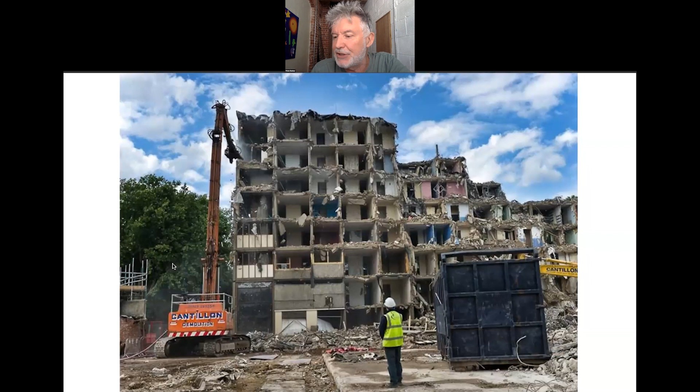This is David Cameron again: 'I believe that together we can tear down anything that stands in our way,' and tear it down they have. In some cases it's being replaced by this, vast swathes of London where demolition is being enacted. This is South London, this is Battersea Power Station, with vast amounts of global capital coming in and building shiny new turnkey developments, many of them empty. There are 30,000 empty homes in London—really criminal in the context of the homeless problem that we have.

And this is the consequence. This is a photograph taken in a subway a few hundred yards from Apsley House and Buckingham Palace. And it's to our shame, our shared shame.

We live in a democracy. We're not just architects, we're citizens. And we're allowing this to go on.

This is somebody's bedroom. It's a picture taken by a homeless person as part of a project that a friend of mine ran, where people were given disposable cameras and invited to take a picture of their own environment. And this is somebody else's flat, a one-bedroom flat in Knightsbridge which sold for £10 million.

So it's a question really of resources not being allocated equally, and really, really shocking. Elsewhere in the country, there are areas which have become depopulated as a result of post-industrial decline, beautiful streets of beautiful Victorian housing which are just boarded up and empty.

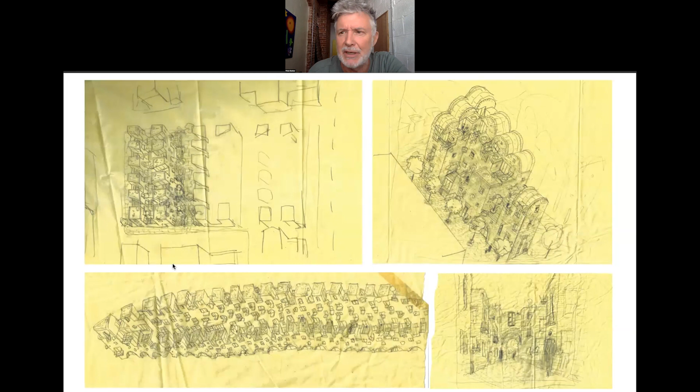I'm still very much at the helm when it comes to designing, and layer after layer of yellow paper are laid onto a site plan till eventually drawings like this begin to emerge and we begin to understand what this thing is three-dimensionally. So we move backwards and forwards between sketches and models very, very rapidly. It's a very dynamic process, and I don't believe the computer can have that sort of dynamism and physicality which we were able to have in ours.

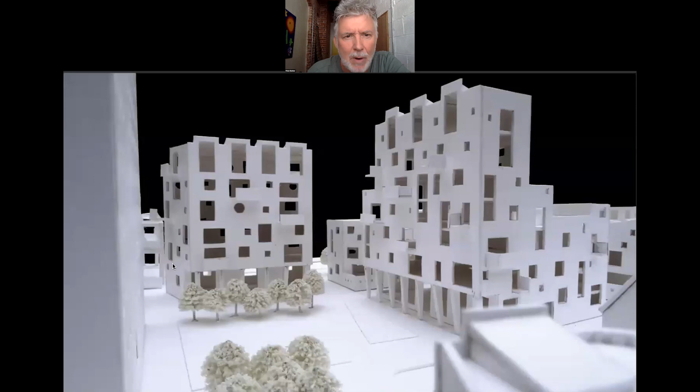Then we move on to a larger scale model where we're able to show fenestration and look at things in a little bit more detail. And finally, on a unit basis, a larger scale, 1 to 50, typically foam core models where we can start to see the interiors and the relationship between the interiors, the street and the courtyards which we're designing.

So this is the first of the built projects I'm going to show you, and it's Donnybrook Quarter. It's a competition we won, 20 or 25, maybe 30 years ago, 25 years ago.

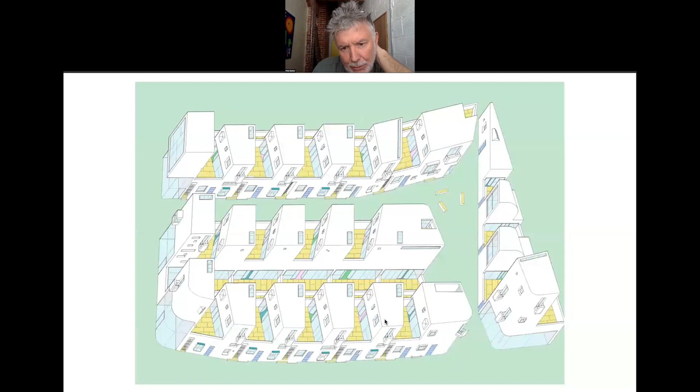You can see it in 3 dimensions here. The cross-site streets there, and then these peculiar units. Now, what these are, that isn't a whole house, that's 2 units. That front door, the blue front doors, lead into a ground floor home, and the gates next to them lead into an upper maisonette. So it's a sort of double stack unit.

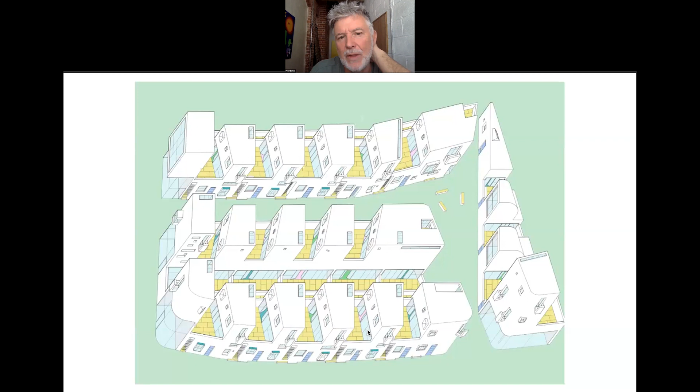But the point here is that there's no common area circulation. The street itself is the circulation of the project, and the possibility of people getting to know their neighbours, or at least recognise them by sight in a street or on a square, seems to me much more likely than on a corridor or in a lift or on a deck access in a shared apartment block. So that's the benefit that this idea, this typology, the double stack typology, brings.

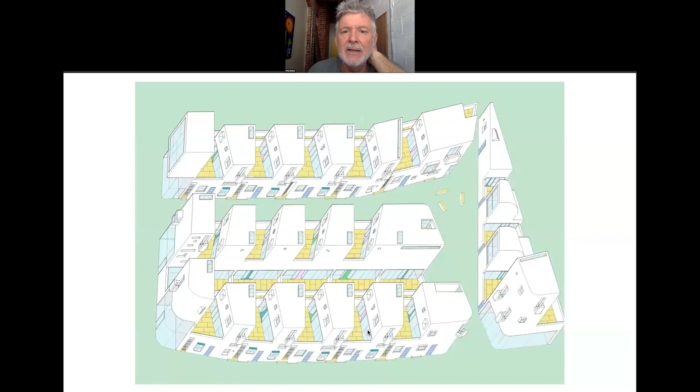The other benefit from a developer's point of view is they're not building loads of common area circulation, which needs to be paid for. Typically an apartment block has 20 to 25% staircases, lifts, corridors which need to be paid for to be built. So in a £5 million project, £1 million quid's going into building corridors, lifts and staircases. And then it also doesn't have to be cleaned and maintained in the long run. So there are social and economic benefits to doing housing like this.

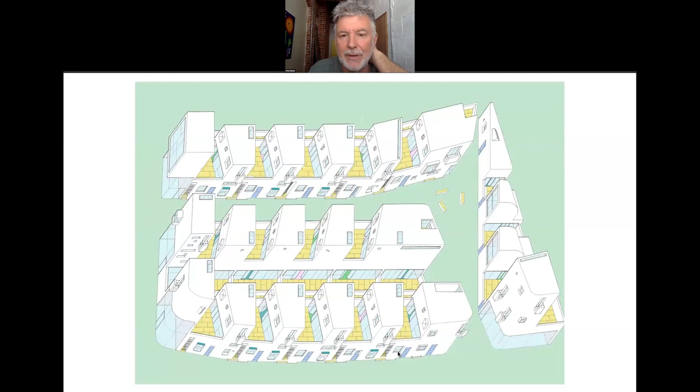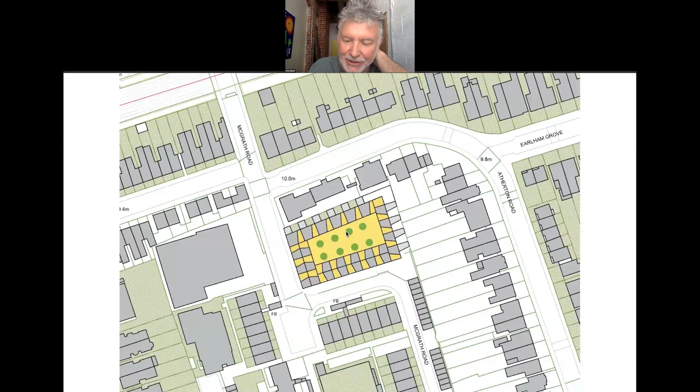This again is a place with no common area circulation - they're all houses. You can see the street corner and a row of houses facing out onto the street, and another row facing into the little tree-lined courtyard. There are arches at the right-hand end and the left-hand end leading into that courtyard.

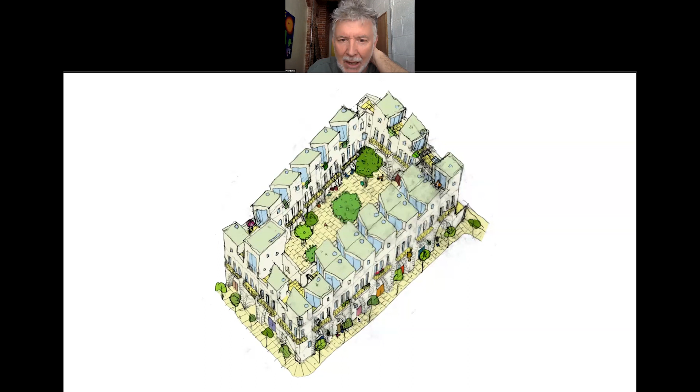Each of the four-story houses has a kitchen on the ground floor, a bedroom, and then a living room on the top floor, where they have the use of this little private courtyard.

So back-to-back housing was a form of housing typology which was very common, particularly in the north of England during the Industrial Revolution, when people arrived in their hordes into cities like Liverpool and Hull and Sheffield. During this rapid expansion, low-cost housing was required, and building back-to-back was the dominant approach.

There are very few left. Most of these areas have been demolished as slum housing, but I visited one fragment of back-to-back housing in Birmingham, where there used to be 30,000, there are now 8, and they have been saved by a charity and restored. I was anxious about proposing a type of housing which has effectively been outlawed as slum housing, but going there made me feel very reassured by what I found.

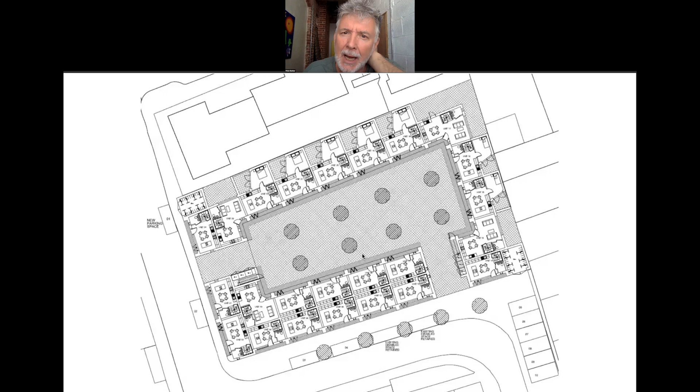I thought if one could deal with some of the issues of Victorian back-to-back housing - giving people their own bathroom rather than shared bathrooms - then this was a really admirable and interesting way of doing housing. Very efficient in terms of materials, because the net to gross floor area ratio to external wall is very efficient, as 3 sides are shared with other homes, and also efficient from the point of view of heat loss.

So there it is. We were very interested because of this lack of back garden, that the front of these houses - we should make a fuss at the front of these houses, hence these arches.

We viewed them as being a little bit like the stoop or porch that they have in the southern states of America. I don't know if you have them in Australia, as being a kind of interface again between the private space of the house itself and the pavement.

There it is again, and there's the central courtyard. There's the kitchen on the ground floor, and the living room on the top floor, with 2 bedrooms in between.

These houses aren't for everybody, and I think the idea that there's one size fits all for housing is quite wrong. One of the problems we have are very draconian laws about housing standards - the kitchen should be this big, the bedroom should be this big, the relationship between them should be this relationship.

I think the houses at McGrath Road are a very good illustration of the fact that a house over 3 or 4 stories with 1 room per floor would suit somebody with good knees. A house where you are right on the pavement suits somebody who likes the idea of knowing their neighbours. But this certainly isn't true of everybody.

And so I think design standards which try and push us all in the same direction in doing housing don't acknowledge that. McGrath Road is a very particular type of housing, but the people who do choose to live there are really loving it.

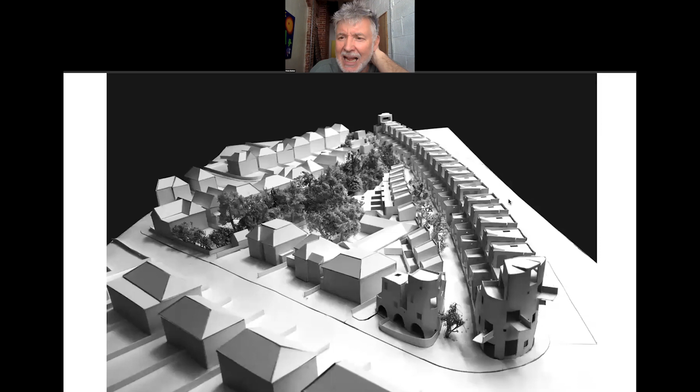The site was bought, in the first instance, by Transport for London, who are in charge of the road and rail infrastructure of the city, as a road widening scheme, which they didn't in the end do. This was about 30 years ago. About 2 years ago it was sold back to the private sector, and my client bought this incredibly unpromising and difficult site.

There are cars on the right-hand side whizzing up and down along the motorway, but our proposal creates a wall against the motorway of buildings 4 and 5 stories high, and a little mews. The grey is a mews which runs parallel to the motorway, and on the other side of the mews are some lower buildings which back onto the existing houses behind.

Each of these is a little walk-up apartment building, and on the ends, these taller buildings are bigger apartment buildings with a lift and a staircase, very efficiently planned, with no more than 1 or 2 flats per floor.

The right-hand building, which is protecting everybody from the motorway, is only 1 room deep, so that every room within it can open a window into the mews. When you're in this mews, you'd never know that the North Circular was there. You could hear a pin drop in there, and our strategy has absolutely paid dividends.

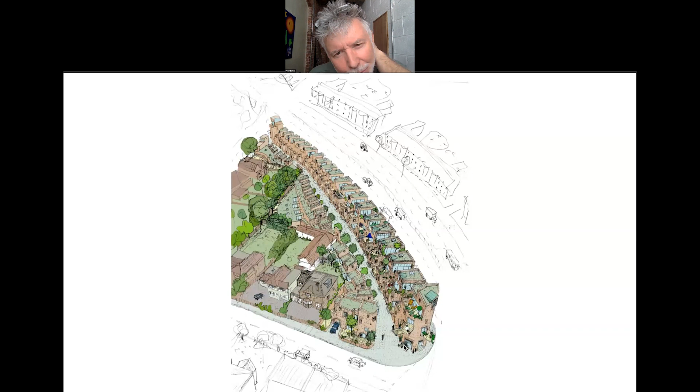We've got 100 homes here. When the site was initially sold, it was believed that it would be 50 homes, and I suspect people were anticipating doing 3 point blocks dotted through this space. But our strategy of building homes against the motorway and protecting the site has enabled us to get double that number, to 100. And there it is.

As I say, you'd never know the main road was there, and all the people in the right-hand block can open windows onto this space for ventilation. And the end building, a taller little apartment building, has a little cafe on the ground floor.

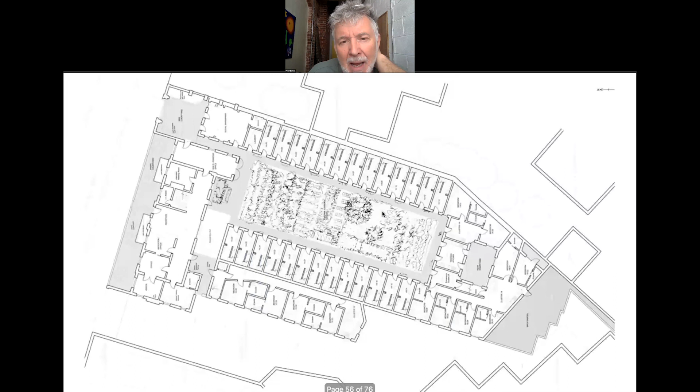We wondered about another idea - that the main hostel on the left, this very deep site, might explore the possibility of a central garden with houses, little tiny cottages all around the edge, giving people that bit of separation from one another, but also a connection with one another in the garden. This deinstitutionalizes the hostels so it becomes a space where people have privacy, their own shower room, their own kitchenette, but also the support that comes from a shared space like a garden.

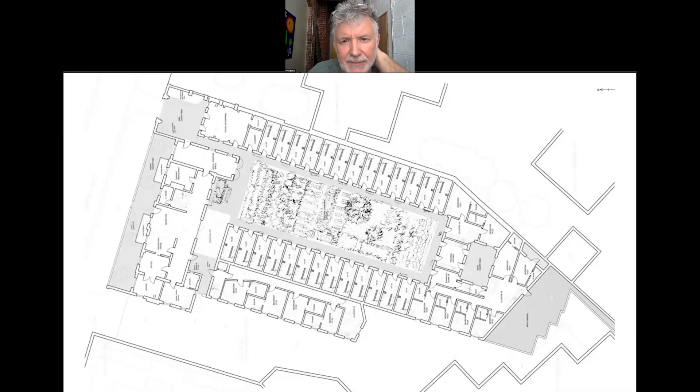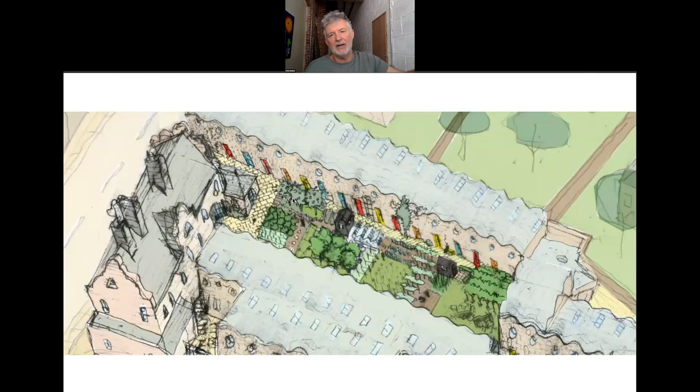This is how our scheme at Holmes Road emerged. We had the idea of this garden, not just ornamental, but a garden for the use of residents, and the idea that it might be a productive garden. Each one of those coloured doors is a door into an individual house. People with higher support needs remain in the main hostel on the left-hand side under the watchful eye of staff who can be supportive, but people doing better have that bit of independence.

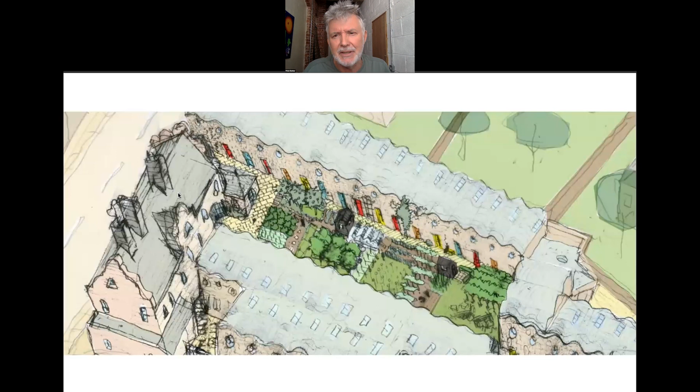I did that drawing before I went to meet the council. Let's remind ourselves that this is what's possible with public money by a local authority who have the interests of the most vulnerable people at heart. It doesn't happen in all councils - many of them ship people out into other areas to get rid of them. But Camden Council take very seriously their obligations and responsibilities to our fellow citizens who are struggling.

When I showed them this picture, the gardens formed no part of any brief, but we thought it'd be a fantastic thing to have a therapeutic garden in which people could work and be encouraged out of their rooms. Very often people in this situation sit in the darkness of a room with the curtains shut - this might be a very positive addition to the brief.

And I read them a piece of writing, which I'm going to read to you. You're in a room full of pretty hard-nosed servants of the borough, people used to a pretty uninspiring environment. There's somebody reversing their vehicle outside - sorry about that. Anyway, I read this to them, and these grey bureaucrats' eyes lit up.

We imagine a group of residents working with a gardener to create and maintain an intensely planted and beautiful garden with an apple tree or two, potatoes, green veg, soft fruit, herbs, a greenhouse, a potting shed, and a sunny spot to sit and rest. So that shed there is not a garden shed - it's a place that people can sit and have a kind of counselling session. We think there ought to be a little room or shed in the garden for private chats and counselling.

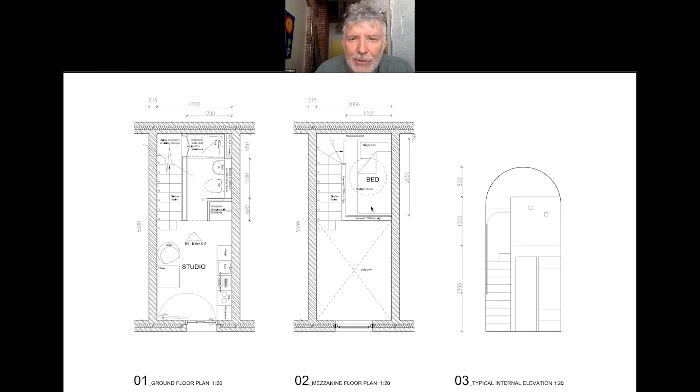Each one of the houses is absolutely tiny - I'm tall and I can virtually touch the walls on either side. It's only a little bit over 2 meters wide. There's a tiny kitchenette on the ground floor, a table and chair, a shower room at the back of the plan, then stairs up onto a space for a single bed and a double height space underneath an arched roof.

This is the final little bit of the talk. I teach, and I'm involved in academia, which is absolutely central to the work of my practice. It's a space in which I can dream in a way that I can't quite so much within the office environment.

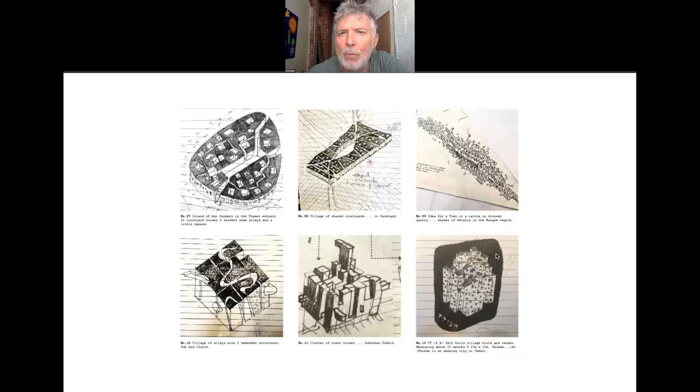I don't need to go through them, but I just think to sketch and to dream, and still to be doing that at 62, is a really important component, a really important thread to run through one's architectural life.

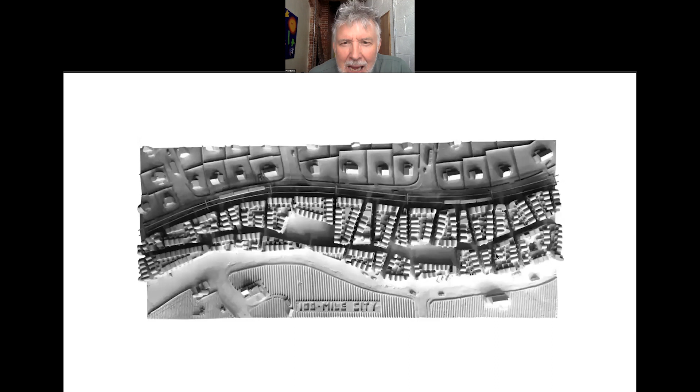And this is the final project. It's another of these 1 Year, 365 Cities projects, one which kind of got hold of me and I couldn't let it go. It's the idea of a city encircling London, and if London is being demolished progressively in central areas - social housing - what might be a better place to put if we need millions of new houses?

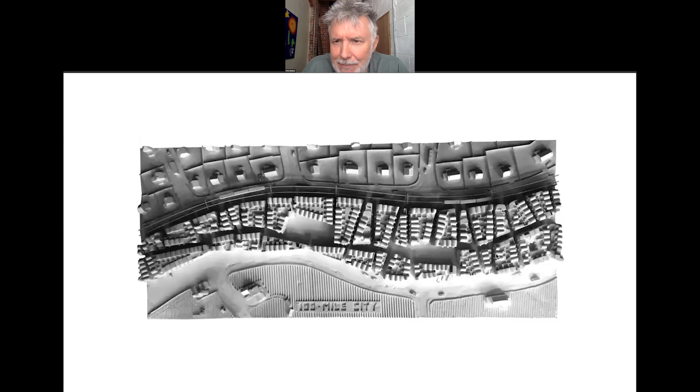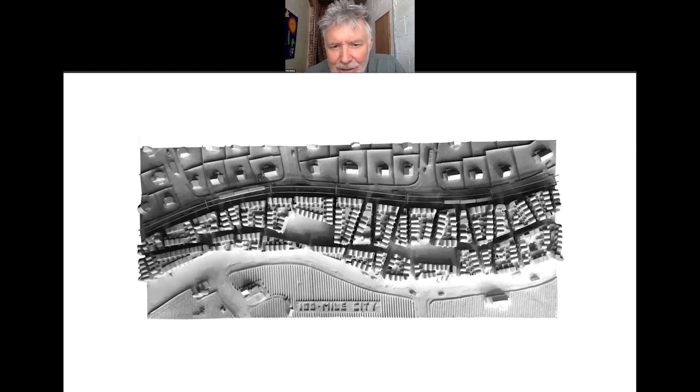My idea was that they'd be built into the last 100 yards or so, 100 meters or so, of suburbia, and that we might demolish a few bungalows at the edge of London to make a dense, intense city of houses, but also schools and factories, creating an edge to our city and an edge to a newly productive countryside. The area at the bottom of this picture is fields, and the top is suburbia, and that peculiar line running along the top of our city is a monorail.

Woven into this are courtyards and streets. I'm going to read you what I've said about this, and then we'll be nearly there.

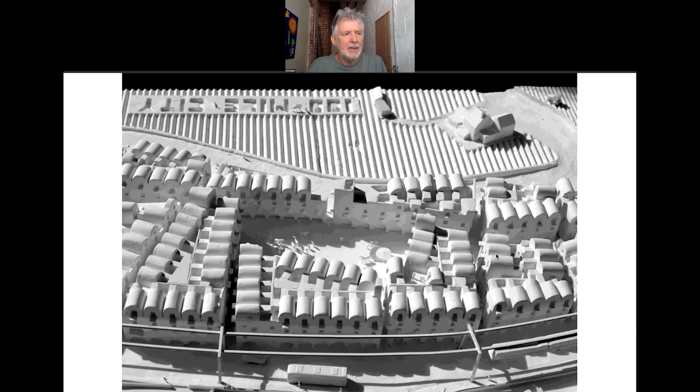The point is that the circumference of London is 100 miles. So this is a city that would wrap right around London, and in so doing, create all these millions of homes. 100-mile city. Build a street-based linear city, 100 miles long, 100 meters wide and 4 stories high. Wrap it around London. Give it little factories, schools, houses and shops, laid out in terraces along intimately scaled streets and around squares. Make it a dense, intense edge to London, a confident, purposeful boundary fronting a revitalized, productive countryside.

100-mile city is a linear Barceloneta, a circular Rome, a stretched Porto, suburbia reprogrammed, hybridized, compressed, catalytic urbanism on fleek. Ride the 100-mile high-speed orbital monorail, souped-up Skyfly Circle Line, connecting the loose ends and frayed edges of London's transport system, its isolated city edge train and bus termini, instantly, meaningfully, usefully connected with circus ride technology. Bexley to Brentford in 40 minutes, super functional, super fast, and super fun.

London has a brilliant train rail system. It is radial out from the center. The idea that one might connect all of those with a monorail is an interesting strand to this project and a really important part of it. It's not just about building housing, it's about developing the infrastructure which makes it usable, functional, and fun.